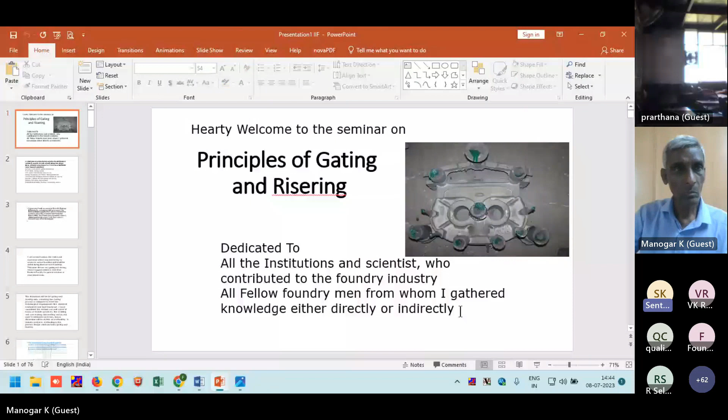Good afternoon, Manogar from Chennai. I'm thankful to the IIF Chennai chapter, Senthil, Palani Murugan, Dinesh, and everybody for organizing this. I'm privileged and thankful to the IIF Chennai chapter - they organized the same gating and risering class which I attended in 1985, if I'm not wrong. So the same thing I'm going to present, with additional information.

The topic is principles of gating and risering. I acknowledge all institutions and scientists who contribute to the foundry industry, and the fellow foundrymen from whom I gather knowledge, either directly or indirectly.

I compiled various information and experience which I acquired during my service in various foundries, and foundries visited during my development of castings for my previous employers. And regarding gating and risering, we are going to discuss, assuming that all the participants know all the foundry processes.

This is only basic working on how to do methoding, and this will be mainly on methoding only, presented for small and medium foundries, not for shell or investment castings. But some principles we can use. All the information is shared in that.

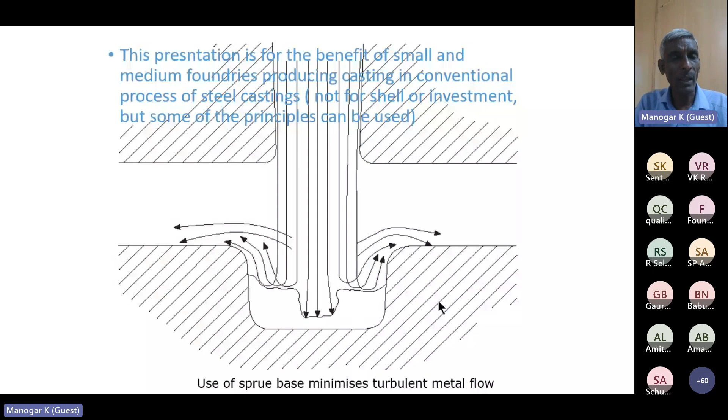So why gating and risering? Customers need sound casting. So what's sound casting? As per Steel Founders' Society of America, it is class 1 soundness at 2% radiographic sensitivity. In olden days we used to say it's sound based on the ringing sound, so we call it sound casting.

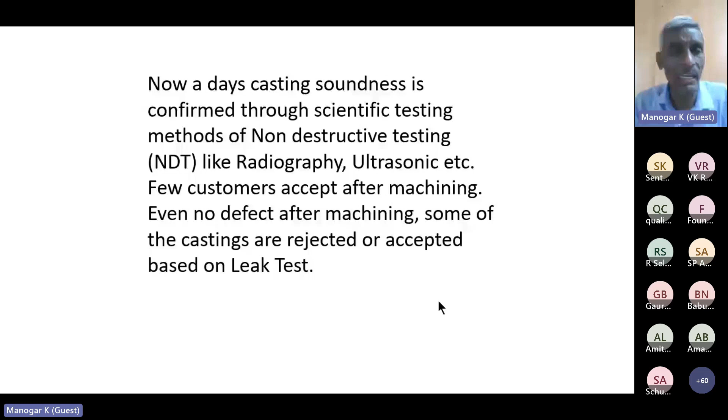Nowadays castings are accepted based on NDT results like radiography, ultrasonic, and some cases are accepted only after machining, if there is no defect, or leak test. Even some castings for food processing, you do polishing, and after polishing there should not be any black dot; small dots are not accepted. Visual inspection. Other NDT like DP, MP also is being used.

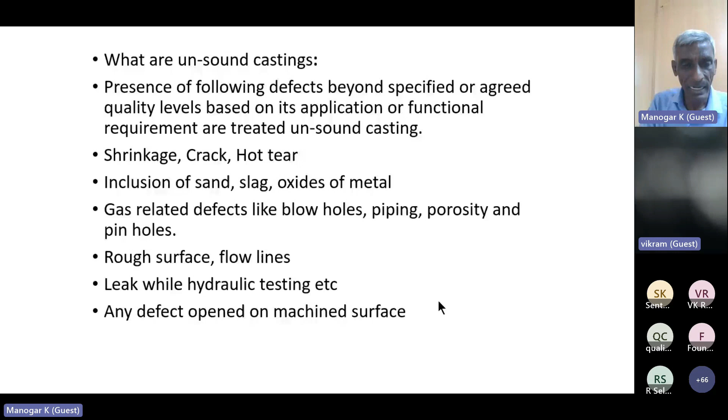UT. What are unsound castings? The presence of the following defects beyond specified or agreed quality levels, based on its application and functional requirement: shrinkage, crack, hot tear, inclusion, slag, oxides, gas-related defects, rough surface, flow lines, leak while hydraulic testing, any defect open on machined surfaces.

How to achieve sound casting? It is based on technical and economic considerations and planning right from design stage, casting process, volume, application, and ease in manufacture. That is one: component design and process design.

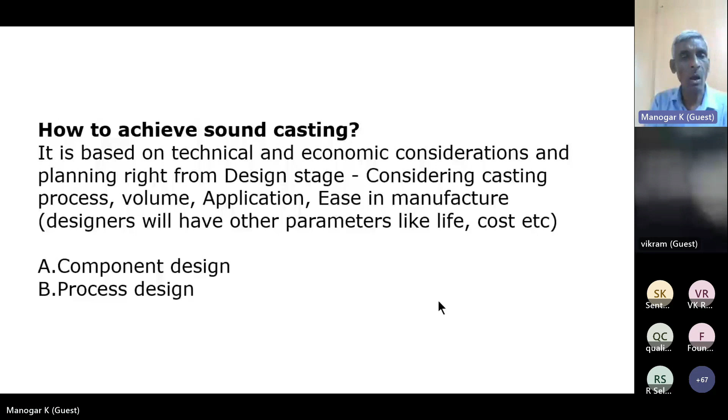The component design - we as a foundryman have to work with our customers so that we can explain our difficulties, get the design made such a way that it is easy for us to produce. So as part of designers, they also nowadays do 3D modeling and simulation, and they ensure that their design is foundry friendly.

In case of some old part numbers or some customers sending drawings where we find it difficult to produce the casting, you can always talk to them, make them understand our difficulties, and get the design changed. And foundry should always be aware of the customer and the product application of the casting, which will avoid unsolicited development. Ask for the requirements and spell out the quality that you can supply at the beginning itself.

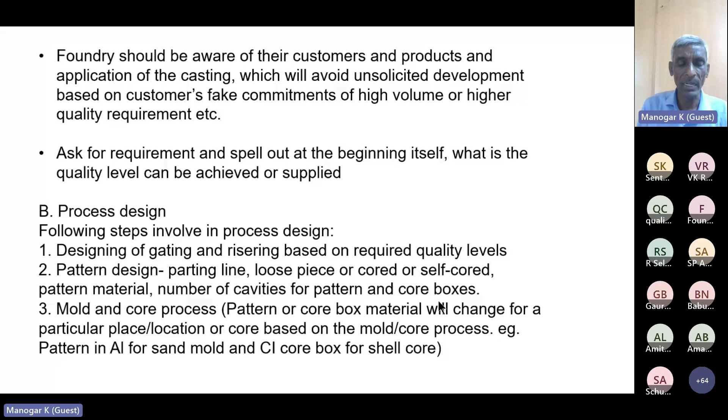So process design involves the following steps: designing of gating and risering based on required quality levels, pattern design - that includes parting line, loose piece, core or self core, and the number of cavities based on quantity, and pattern and core box materials depending upon the process.

Mold and core process, melting, ladle and pouring practices, cooling time of poured molds and knockout methods, cleaning and fettling, heat treatment, weld repair process, inspection methods of both incoming metal and finished casting, process control and auditing of internal soundness - that is sample size, sequence, first mold or last mold, sampling and frequency, once in a year, every day, or every month. What is the frequency depending on your quantity?

Designing of gating and risering based on required quality level - this will be discussed in detail. What are the other steps in this process? Pattern design.

Planning the right tooling makes good casting. Estimate the risering and gating first before you design the pattern, so that you know exactly where the parting line is, how much print you have to give, where the core locks should be given, or any other gauges, core setting fixtures, templates required for the component to come out all right.

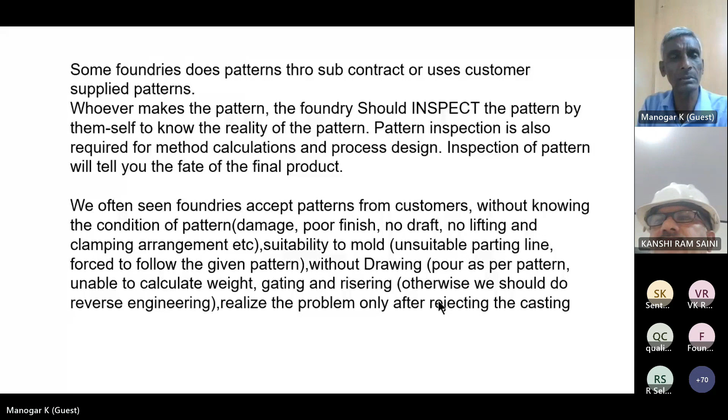What happens - foundries make patterns from outside, or they use customer-supplied patterns, but then rely on the pattern maker for inspection report. But as a foundry, we should inspect the pattern ourselves, so that the methoding person knows the dimensions in the pattern, which he can use for risering purposes. Without inspecting, if we just go as per customer pattern, then we will be in trouble, because the pattern may not be suitable for the individual foundry's conditions.

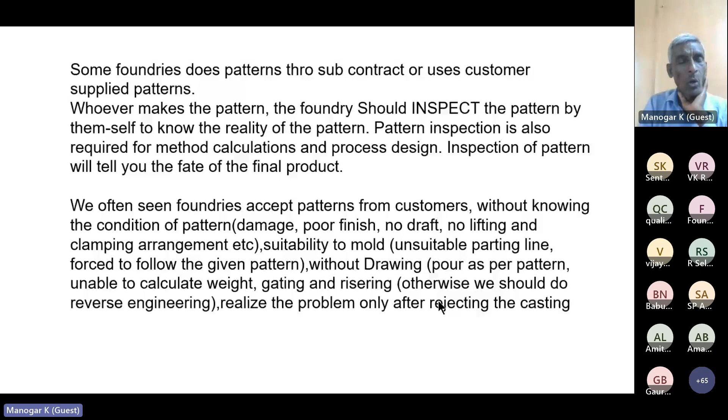Mold and core process - there are different processes, so we have to select the different process for a particular component, or a combination of processes for a given component. For example, where you would use a CO2 core may not be okay, you have to go for a shell core. And again, based on the process you decide, the contraction will vary.

For example, with the CO2 process for a core, it was 1.3% contraction. When we change the process to no-bake, it was contracting 1.6%. Then we will be landing into dimension problems.

Melting and pouring - we have to go through other details. Cleaning process - so shot blasting alone is not sufficient; sometimes we have to do other fettling or machining, either fast or slow.

Hello. Inspection of knockout. Sir, the voice is breaking. No, somebody was interrupted, so I thought I should stop. Okay, right. Now it's okay, sir, please.

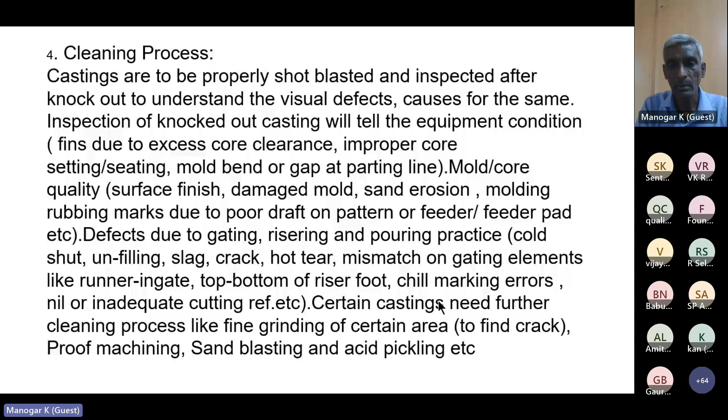Casting will tell the equipment condition, setting, mold bend or gap at parting line, mold core quality, defects due to gating, risering and pouring practice, and marking or cutting errors. Scientific designing of gating and risering will result in quality casting, either manually or using computer simulation, which will help to optimize the risering.

Why gating and rising? To achieve sound casting, properly designed gating and rising is required, apart from other parameters being taken care of. We often see foundries have all kinds of facilities, techniques and technology, but lack proper methoding. Companies invest in all that, but there is no proper person to do methoding.

So methoding decides the profitability of the foundry. If you over-rise, then it results in less productivity and loss of metal, melting, cutting, and everything. So it is good to have a proper methoding person.

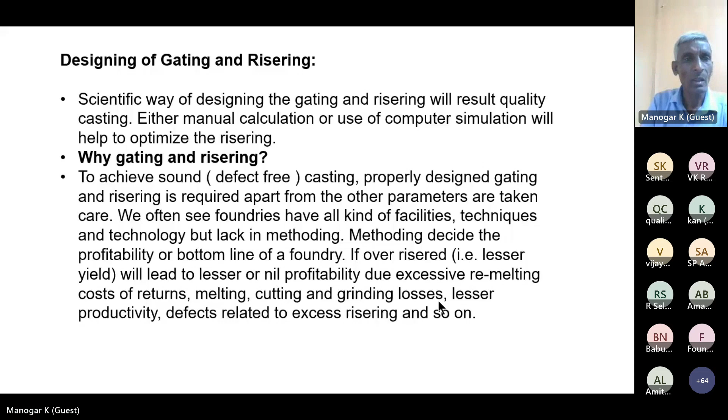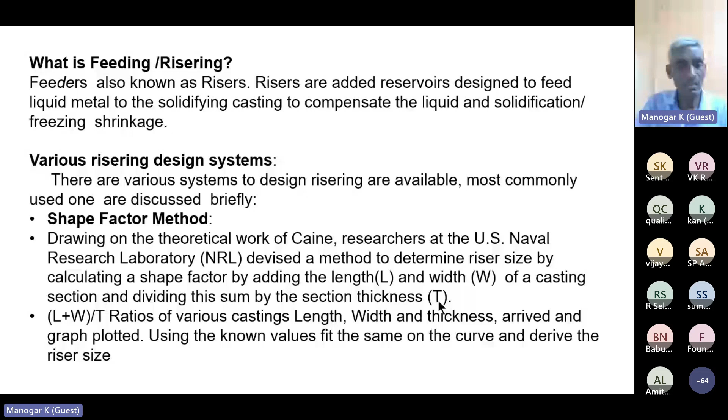What is feeding and risering? Feeders, also known as risers, are added reservoirs designed to feed liquid metal to the solidifying casting to compensate for the liquid and solidification shrinkage. There are various risering designs. This one is the shape factor method, which is not used nowadays.

There's the geometric method and Heuvers' inscribed circle method, which some people use as a shortcut. The scientific way, or the principle most used in steel foundries, is the modulus method or Wlodawer method.

As per Chvorinov, the solidifying layer obeys the rule x equals k times square root of t, where k is a constant depending upon the boundary conditions. Modulus is the ratio of volume and surface cooling area. Then there is the freezing ratio, which is the ratio of modulus of riser and casting.

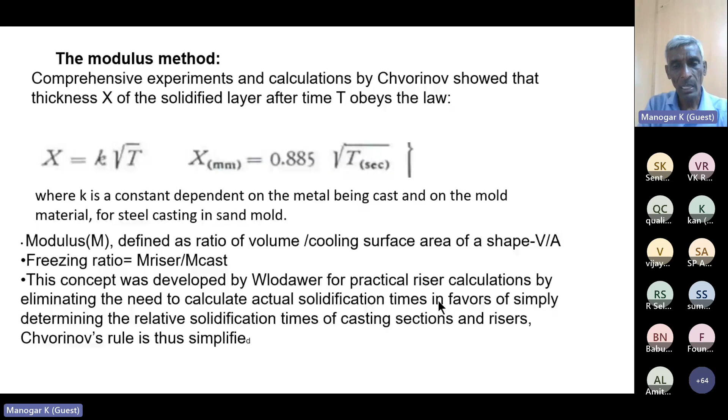This concept was developed by Mr. Wlodawer for practical riser calculation, eliminating the need to calculate actual solidification times. In this system, the feeder size recommended is deduced from the cooling modulus. The casting is subdivided wherever necessary into basic shapes, for each of which the volume-area ratio can be readily determined. Only the cooling surfaces are included in the calculation; imaginary contact surfaces are omitted. The feeder is then selected on the principle that it should have a modulus value 1.2 times the casting modulus. This will be discussed in detail.

There are three principles in feeding. First, freezing time: the freezing time of riser and casting are proportional to their respective modulus. If the modulus of the riser is sufficiently greater than the modulus of the casting, good feeding will be obtained.

Second, feed volume: the volumetric shrinkage of the casting should be fed by the riser. The riser should be capable of supplying sufficient volume of liquid metal to compensate for the liquid and solidification shrinkage of the region where the riser is connected. Volumetric shrinkage varies for different metals, as shown in the table.

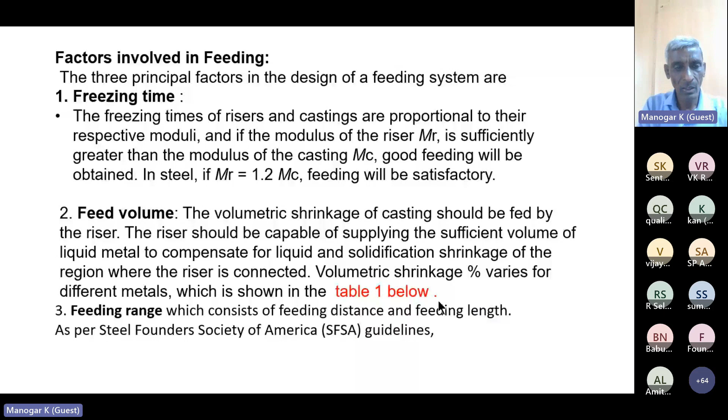Third, feeding range, which concerns feeding distance and feeding length. As per Steel Founders' Society, feeding length is the theoretical feed length of the casting or section under consideration to be fed. The distance from the riser to the farthest point in the casting is the length to be fed. It is a purely geometric value.

Feeding distance is this distance. Feeding region is the area of the casting which will be fed by a single riser. Feeding areas bounded by end zones are larger than those without end zones.

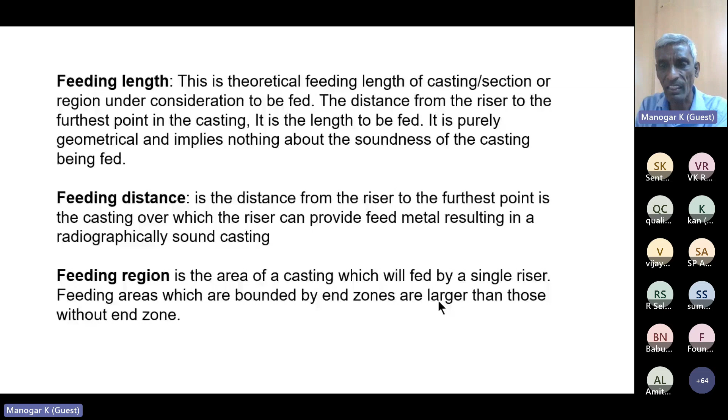The steps in methoding are: study the drawing and mark junctions and sections; identify sections needing feeding through simulation software; calculate the modulus of the selected section to find the riser number; and calculate the feeding range, feeding length, and feeding distance based on the casting thickness.

Decide whether a top or side riser is needed. Calculate the neck dimensions and foot-up if it is a side riser, and the riser should be capable of feeding the foot-up weight also.

Calculate the feed volume or weight of the selected section, marking on the drawing the feeding regions and confirming all areas are covered, in case of bigger castings, preferably on the actual pattern. Once the pattern is ready, if any uncovered area is found, you can plan for a chill, an extended pad, or additional risers.

Calculate the pouring weight, pouring time, and choke area. Calculate the gating elements. Do simulation if the facility is available and fine-tune the results.

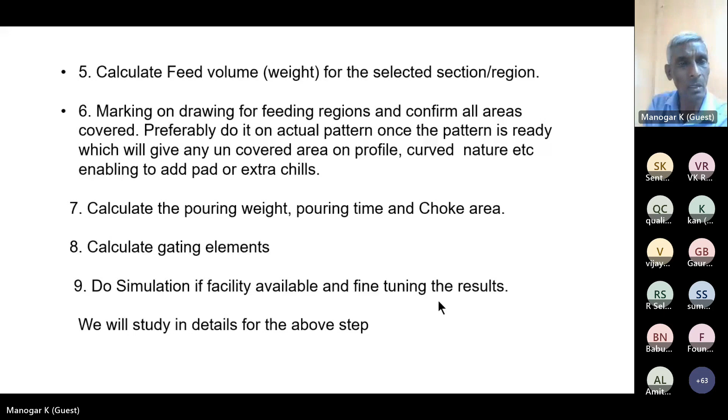So step by step we'll go by doing this method. Study the drawing and mark junctions, heavy sections that need feeding.

The science of casting modulus calculation is based on the subdivision of complex parts into simple basic components, as shown in the sketch below. I will show you an example. It must be borne in mind that the subdivision is only imaginary. The imaginary interface between two basic components is certainly not a cooling surface.

Subdivide the casting into basic shapes which need feeding and use simulation software if available. Let us do this following example. So I am taking a small example for understanding the calculations. This is a 3-inch ball valve body.

We have marked flange F1 and F2 for the second flange, ball side flange, seat ring area, and the gland area. There are 6 sections we marked. So the part is divided and numbered based on sections that need feeding.

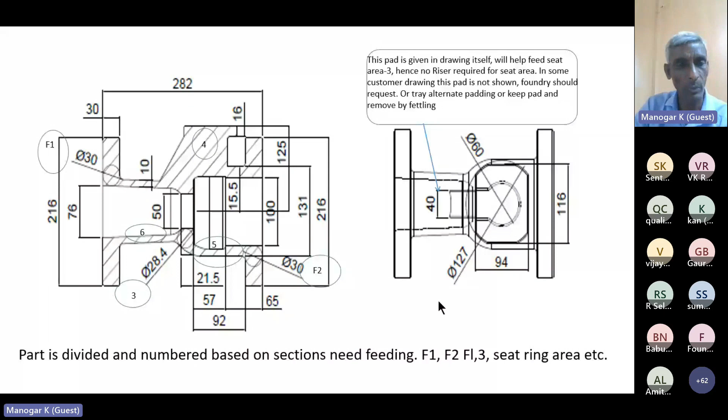Here the pad is available in the drawing itself on item number 4. That is helping to feed the seat area from the gland section thickness. This is the best design of the valve company, and it helps the foundry person. There are some items where there is no pad.

Calculate the modulus of the selected section junction. Find the riser diameter. Modulus equals volume over cooling surface area, which is shown here in the example. You should not take the drawing thickness, it should be the inscribed circle where the junction is, considering the fillet effect. The modulus should be 72 into 115.

Not viewing, sir, excuse me sir. Drawing not viewing, not able to see? I'm watching you only. Sir, we are able to see, we are getting the screen. Please check your settings. I think maybe some setting issue, sir, request to check at your end. I think we are able to see. Yes sir, please go ahead, sir. Okay, thank you.

Consider the draft and machining allowance from the actual pattern dimension. Do not follow the drawing dimension.

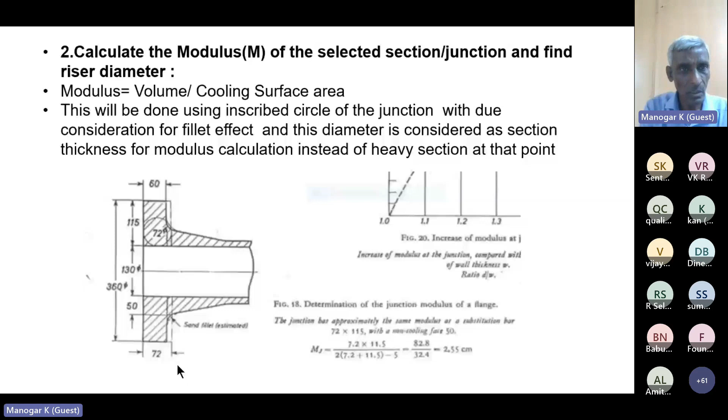With a 3D model, the modulus of an individual feeding region and weight can be easily calculated if the 3D model is available. Nowadays everybody is doing CNC patterns, so it is easy for engineers to find the modulus and weight of the sections. That is very easy nowadays.

If cored holes are present, apply a suitable correction factor. Wherever possible, required draw a full scale view of the particular section and do the calculation. Do not assume, or use the 3D model.

We need not calculate the entire casting volume and surface area. Consider only the location, area to be fed, and modulus of the selected section. The riser attached has a particular modulus to be considered. Refer to the sketches.

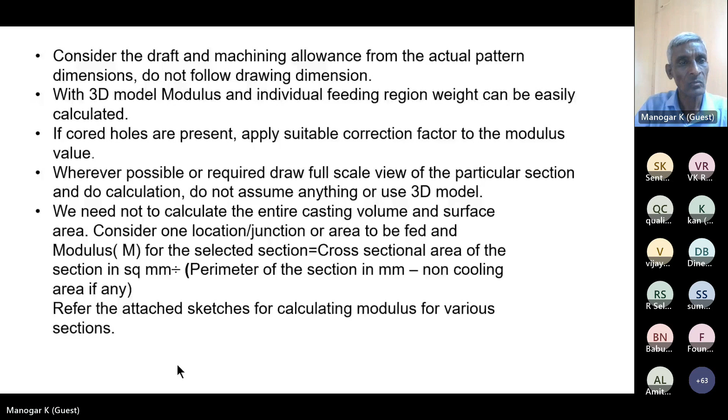These are the basic formulas which can be used for calculating the modulus for different sections. These are basic formulas you can use to find the modulus.

The feeder should solidify later than the casting, that is, the modulus of the riser should be greater than the modulus of the casting. The factor 1.2 is required to compensate for the additional cooling surface area which is generated as the riser continually feeds metal to the solidifying casting.

For steel casting, multiply the modulus in mm by 6.4 for a sand riser, and 4.3 to 4.5 depending upon the sleeve efficiency which you have arrived at in your foundry for the exothermic sleeves. Follow the standard table provided by the sleeve supplier, and do not mix other supplier sleeve standards with another one and get confused.

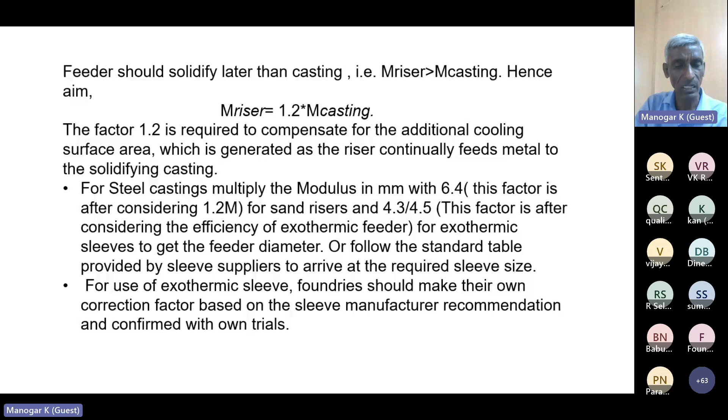Foundries should make their own standard correction factor based on sleeve manufacturer recommendations, and do a cube test to confirm the sleeve efficiency and factor of safety.

So we go as per the drawing, F1, F2, F3, F4, all the sections. We enter the dimensions and find the mean diameter, casting thickness, flange circumference, cross section area, and now the modulus, the non-cooling area.

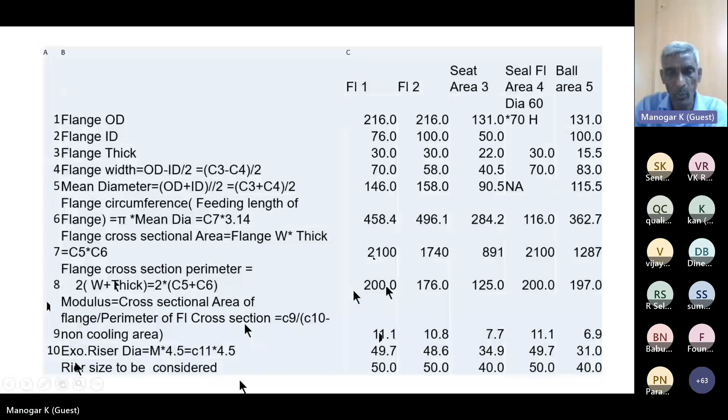Serial number 8, flange cross section perimeter. This modulus equals serial number 8, C9 by C10, 11.1. So the riser diameter considered is 49.7, which we are rounding up to 50.

Like that, in every section the modulus is calculated and the riser is arrived at. This is available in the Excel file, and I can share it if anybody wants.

Calculate the feeding range, feeding length, and feeding distance. As per the plan, it is already given the circumference, that is the feeding distance supposed to be fed, and the thickness of the flange is 30 mm. So for the flange thickness, the feeding length, feeding distance, is 4 times the thickness.

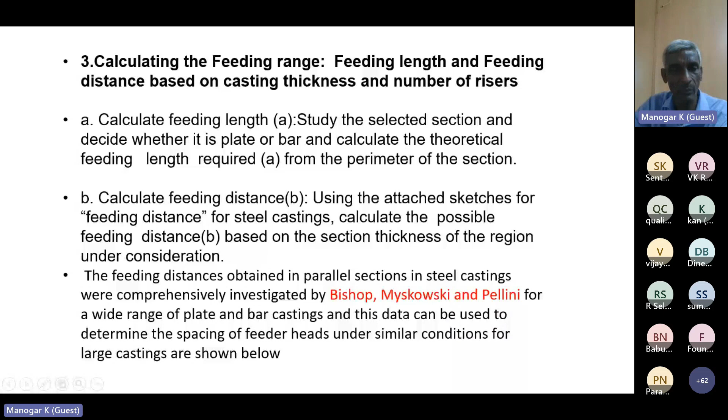So from the riser side, on both sides, calculate the feeding distance obtained in parallel sections were comprehensively investigated for a wide range of plates and bar castings. This data can be used to determine that, as shown here. So you can use these sketches to find the feeding distance and use the feeding distance formula.

Calculate the number of risers, adding the diameter of the riser and the 4T or 5T with or without chill, whatever is shown, whether it's a plate or bar, and find out the feeding distance for a particular riser on the section thickness. So the number of risers is found by dividing the feeding length by the feeding distance.

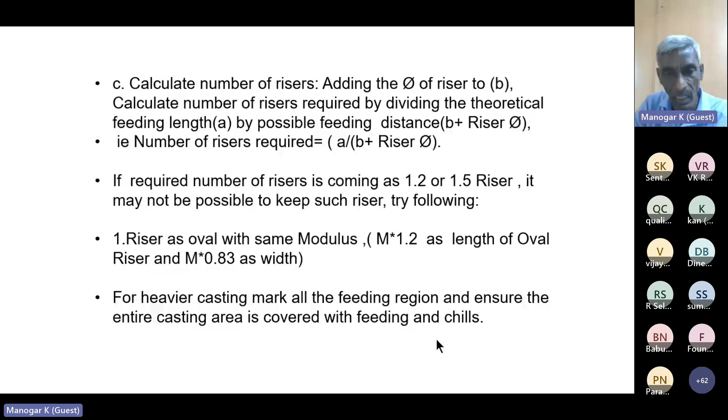You can follow like this. This is the example given. So without chills, the number of risers is more. When you use the chills, the number of risers is reduced, and it improves the yield.

So feeding distance can be increased by adding padding or chills. The padding methods will be shown in the last sketch. And decide whether it is a side riser or top riser.

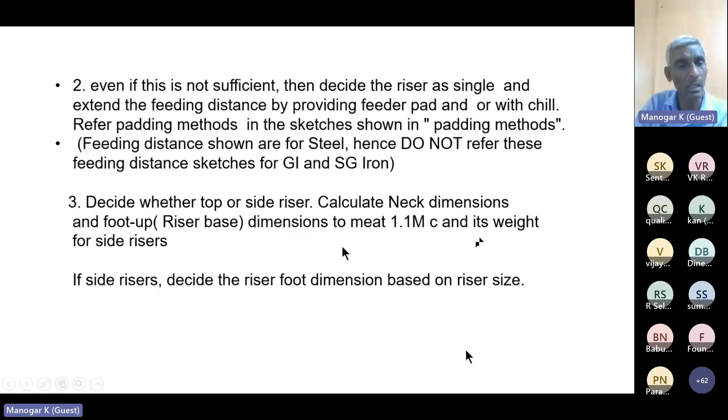If it is a side riser, then you have to calculate the neck contact modulus, which should be 1.1 times the modulus of the casting. The side riser should then have a foot up to keep the riser. Then the foot up weight also has to be considered along with the casting weight for the riser to feed.

So here the flange circumference is 458, feeding distance of the riser is 240, that is 4 times the thickness. Number of risers required is 1.5, so round it up to 2. Like that, all 5 sections, we arrive at the risers.

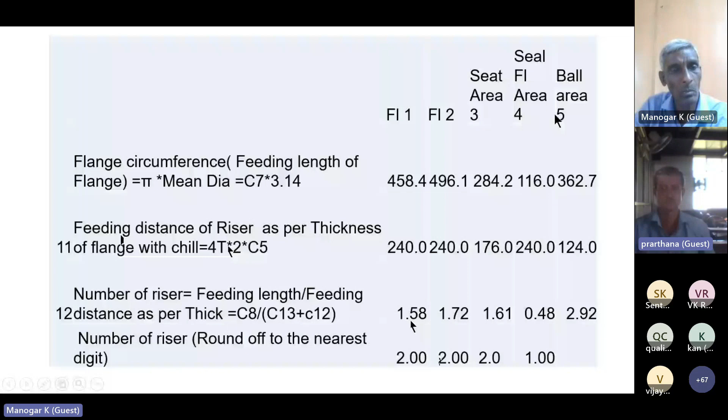Cross check the neck modulus and ensure that it is meeting 1.1. Otherwise, adjust the dimension width or thickness depending upon the section you are going to connect. Because sometimes the width may not connect, then you may have to increase the thickness.

And also sometimes top and bottom risers are coming, then you have three risers, then the foot up should go fully in the bottom, so all the necks should be in the bottom. You have to decide accordingly, depending upon the number of risers and the position of the riser which you are going to use.

The neck, the foot up radius, should be a spherical radius. Normally I see foundries not keeping the spherical radius for the bottom side of the foot up. So it is better, so that it will have a better surface area and improve the yield.

And it should also have a well base. This is also not followed in many foundries. They simply keep a flat base. It is suggested to use a spherical base.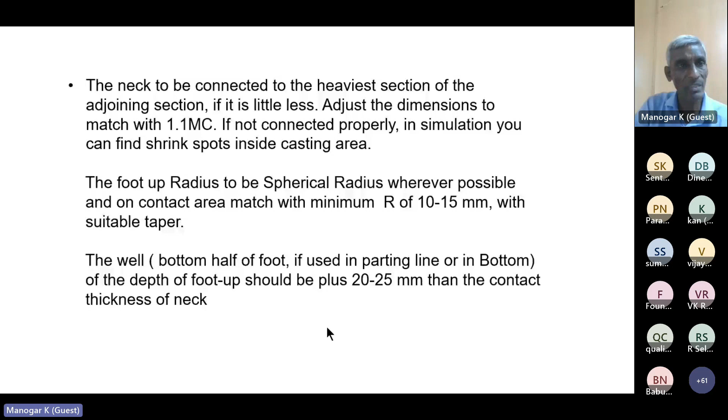Calculate the feed volume for the selected section. For feed volume, we need not calculate the volume. We use the weight from the model.

The weight you have to calculate is the casting weight for the given particular riser region, that is, what you have marked as the feeding distance and the riser. And along with that, for this example here, the flange and the flow bore, there is a 10 mm wall thickness area that will also get self-feeding from the flange.

The adjoining area up to the 4T or 5T and the foot up weight. You have to calculate both the foot up weight, the adjoining area weight, and the job weight.

Using this weight, calculate the volumetric shrinkage to be fed from the riser for the selected area. The volumetric shrinkage varies depending upon the alloys which you are going to cast.

So these are some of the examples given. Carbon steel 6-7%, and heat resistant steel with different chemistry, and cast iron expansion. Even though they say cast iron has expansion, for heavier sections we still have to consider risers.

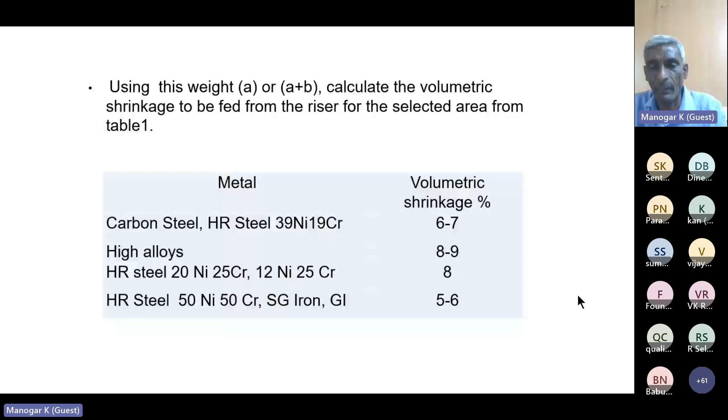Calculate the riser height based on feed metal requirement. We already arrived at the riser diameter, and we know what weight we need. So we have to find out the height from the weight we need from the riser.

So the riser efficiency should be considered. For that riser, whatever riser metal you are using, either sand casting, insulating riser, or exothermic riser, its efficiency is given by the suppliers.

So take care of that efficiency and calculate the riser weight you want. Foundries should make trials and set their own standards to confirm the efficiency.

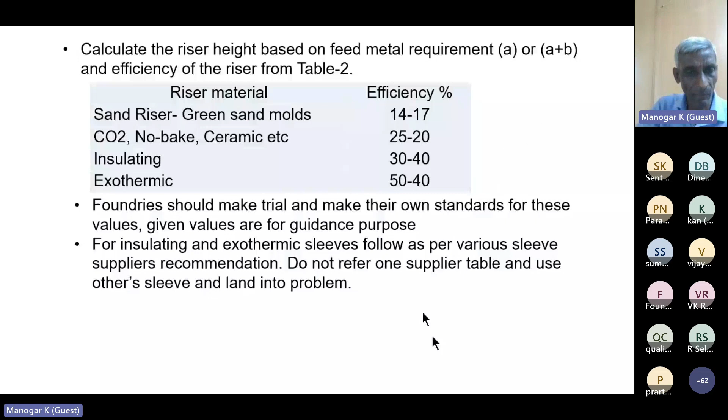Calculate the riser weight and height as explained in the given example. So we will see the next calculation.

The weight of the riser is 7.6 kgs. At 6% for steel casting, the feed metal is 0.45 kg. So it will vary depending upon the section thickness.

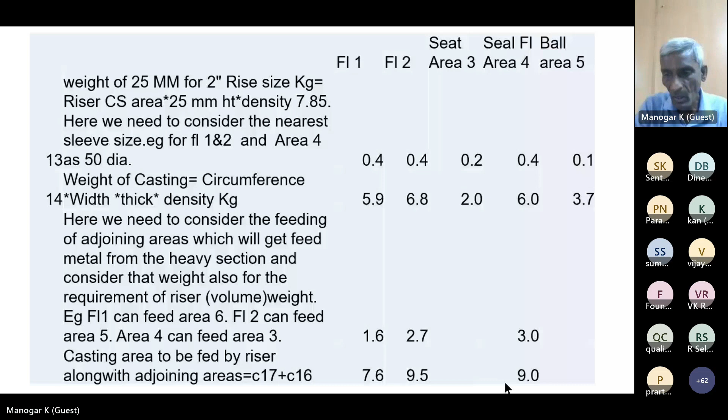Calculate the riser weight and height as explained below. Weight of the riser for 25 mm is taken as a guideline so that I can arrive at the height. Weight we want to feed is 5.9 kgs. For that, volumetric shrinkage is as per 6%.

Weight of the casting to feed per riser is 3.8 kgs. Since number of risers is 2, we need to add side riser, then consider the weight of the riser foot up, and that is 0.9. Total weight to be fed by one riser is 4.6 kgs. So feed metal required at the rate of 7% for this 4.6 is 0.33 kgs.

The efficiency of the riser is considered as 40%. So then weight of the riser should be 0.96 kgs. Divide this by the 25 mm height riser weight, and we will get the riser height. This is 2 inch. So 2 inch is sufficient, but we have the job height.

The job height above the parting line is 108 mm, and with the foot up, it is coming to 72 mm. So you can go for 3 inch, but above the flange you have to keep for the safety for the liquid contraction. So we are keeping 50 by 100 mm. So this is the riser height we arrived at now.

Repeat the steps for all the other areas like this. Weight for all risers, add casting and foot of weight, and find feed metal requirement.

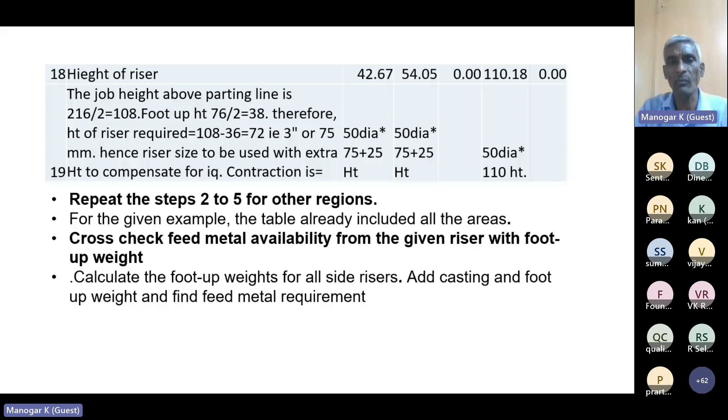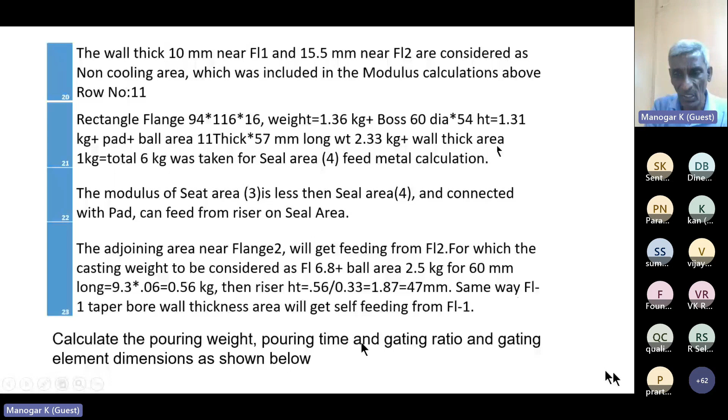Calculate the pouring weight, pouring time, and gating ratios and gating element dimensions. Follow the gating ratios depending upon your experience on the metal being cast.

In steel foundries we normally use unpressurized gating. I've seen some foundries use pressurized gating also for some items. So different ratios are followed for pressurized gating and unpressurized gating, as given.

Considering the riser diameter and height, riser weight is 7 kg, riser foot of weight is 4.5 kg. Assume a down sprue gating system, and pouring casting weight is 25 kg. So now the pouring weight is 38.5 kg.

From this, find the pouring time. Pouring time is the square root of pouring weight using the formula. And from this pouring time, you find the choke area, that is square root of pouring weight by 1.1 times the pouring time. That is coming to 30.16 mm diameter.

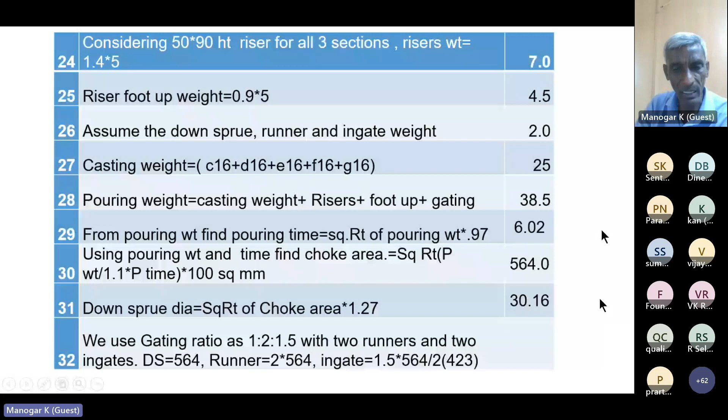That is the choke, that is the down sprue diameter, because in steel casting, down sprue area should be 30 dia. Then using the ratio 1:2:1.5, calculate the runner size, that is given here as area, and in-gate area is given.

Calculate the theoretical yield, casting weight divided by pouring weight. After actual casting, record the actual casting and pouring weight in the sample route card.

Now you can decide the parting line and the process. Plan for additional requirements of mold box, riser sleeves, padding, material lifting and clamping arrangements, pattern, mold card, everything, and process parameters like chills, profile chills, core hollow making piece, templates, and fixers for core assembly, etc.

This is part of pattern design, but after designing the gating only, then we know what things are required. So this is my suggestion. If you can use that.

When the pattern is received and made ready, arrange inspection and match plating if required, to require loose gating and lifting arrangements for the pattern, computer aided. If software is available, run the simulation and confirm the result or fine tune before sampling.

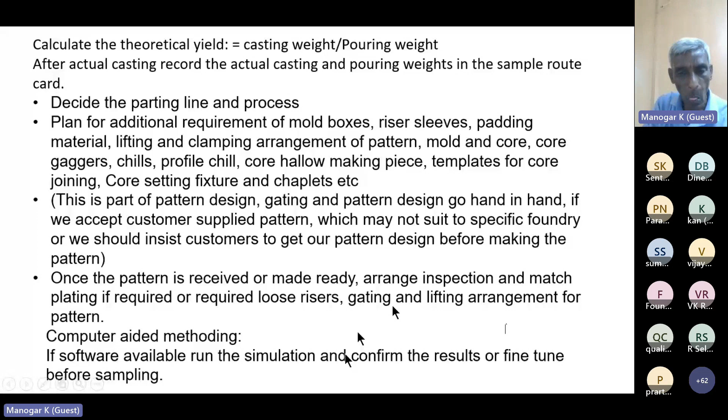Sample casting. Make a method sketch. Write all information like size, type, and number of risers, mold and core process, box size, special instructions.

Instruction to include method card and pattern or core box or marking, use of dummy or making hollow in cores. This is especially important in steel castings to avoid any crack.

And marking up, cutting in the mold brackets, cooling brackets to avoid cracks. Use of templates for core joining, core pasting, since two halves are always joined in steel foundries. So you make gauges for that.

And in some areas we use zircon or chromite sand to avoid fusion and to avoid in between seals, to avoid cracks and avoid fusion. We will put it in the fillet areas.

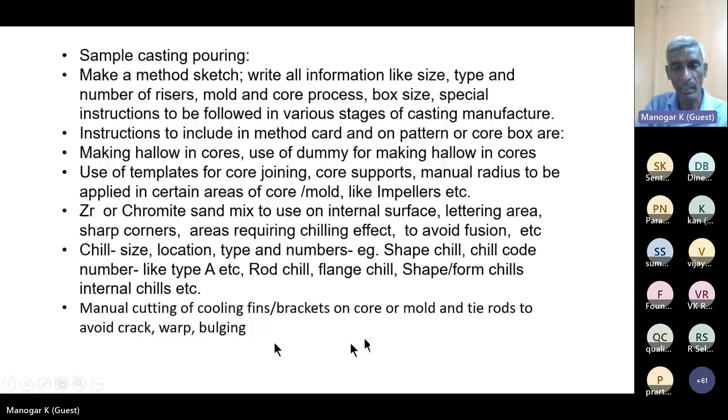All that you have to mark in the method card and also on the pattern or core box wherever it is required. And for chills, we can fix a location and write the chill size, type of chill, riser type chills, quantities, all that.

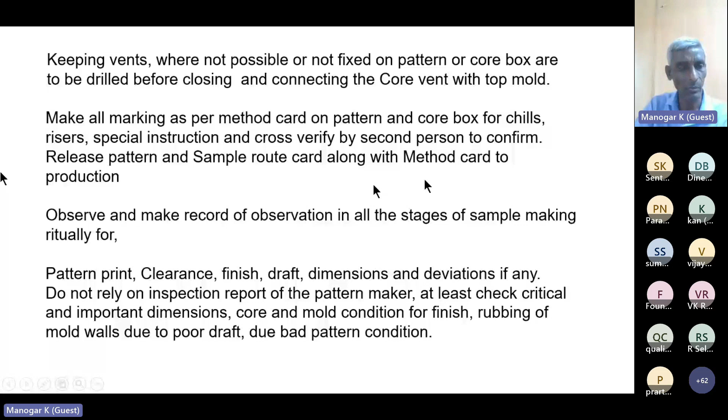While making the sample mold and closing, please observe all the steps. Making the mold, core setting, closing, clamping and weight placement, everything should be observed by the development person, so that he knows if any step is missed or something happened that is going to affect the quality of the casting. We can correlate after that by seeing the knocked-out casting.

Check mold core wall thickness, parting line mismatch, mold bend, and gap between cope and drag. Some foundries keep video or photo also for sample making and closing.

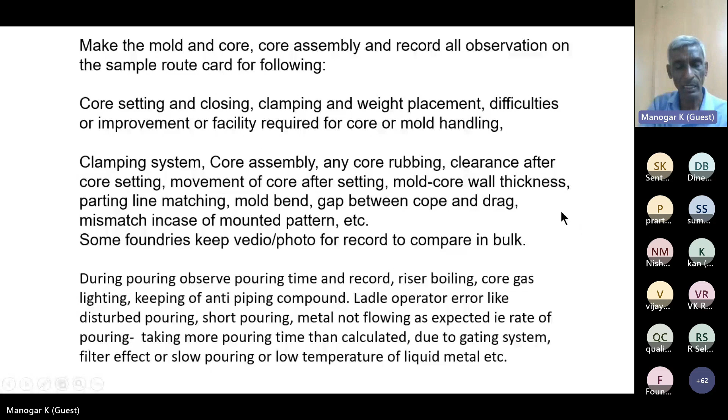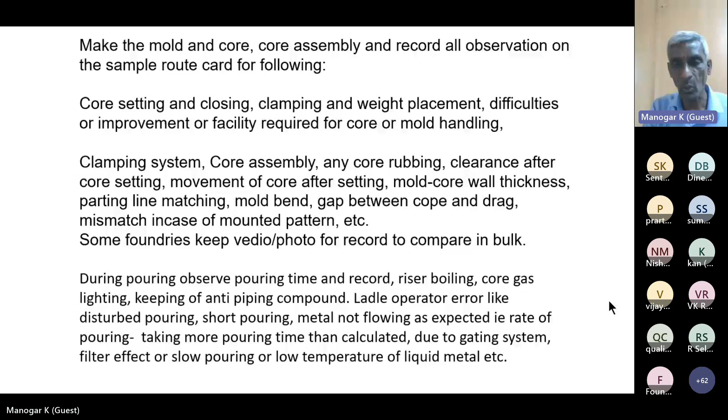During pouring, record the temperature, pouring time, temperature in the furnace, temperature in the ladle, and lighting up the gases and providing the anti-piping. But for the anti-piping compound, people are not simply putting some quantity - as per the supplier, you have to weigh and keep the packets and put it properly, not just simply putting by your spoon. This one point is missing in many of the foundries which I visited.

Pouring time is an important thing - whether as per the calculated pouring time it was poured or not, and if there was any difficulty or disturbance while pouring, the person should record all that, so that based on the casting result, we can correlate the reason for the defects.

First, after shot blasting, you have to inspect for any difficulties in cutting and visual defects. Also the person should be involved in the dimension inspection and see that the person is following the drawing reference and taking the pattern reference, not on the ground area or mismatch casting. All this inspection is also part of what the development person should observe.

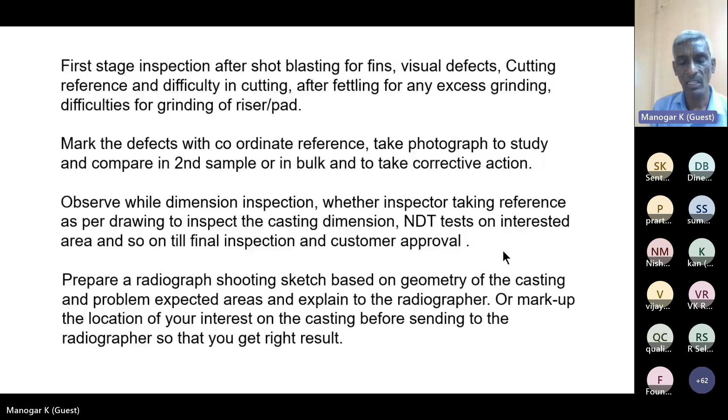Observe the NDT results, especially RT - before sending the casting for radiography, you should have the casting thoroughly inspected. Any visual repair should be done and a note taken of the defects, then send the casting for RT. Sometimes what happens is people, for urgency, send the casting without checking. Then the visual defects are seen on the RT, and they unnecessarily repair and take action for that without knowing it was a visual defect.

The method person should be aware of NDT reading, how to interpret the film. Many times what happens is the NDT person gives a report calling gas or shrinkage a crack, or misinterpreting crack, gas, or shrinkage.

The shooting sketch also you have to be careful about and see how they are shooting the casting. The RT film view should be evaluated for any expansion or contraction of the view compared to the casting size, which will change the assessed level of the defect.

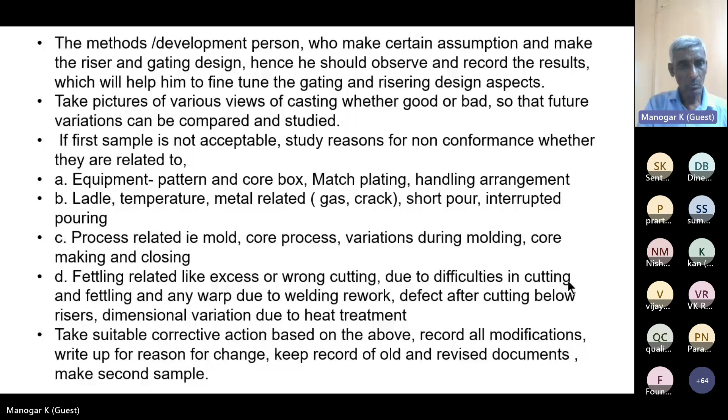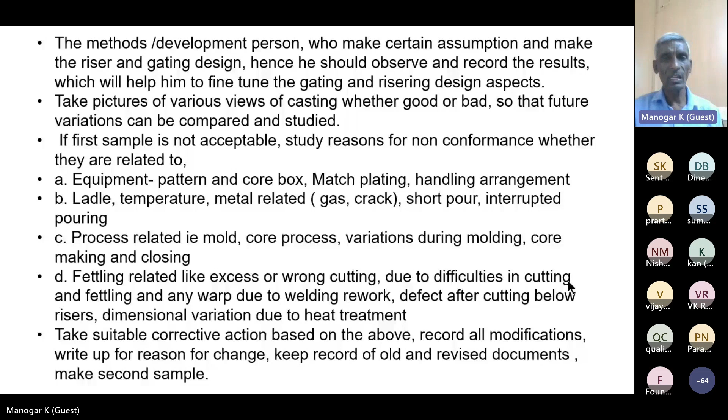For method change, keep a record of old casting dimensions, machining allowance, defect location, nature and percentage of defect before proceeding for method change. Sometimes a revised method creates a new problem - without seeing the actual effect, if we simply change something, we invite some other problem because of the revision. Sometimes we have to change the top and bottom totally together, so at that time this record will help.

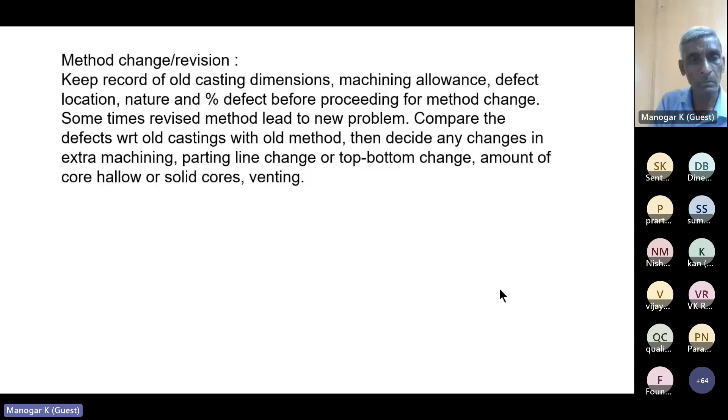As per Scrata, some points I want to share here. They suggest it should be a faster or shorter pouring time. In many foundries, the pouring time is not as per what I suggest - square root of pouring weight or less than that - but it is more than that. In that case, we end up having a lot of defects.

Scrata suggests using faster pouring, and to achieve faster pouring and meet the pouring time, our down sprue and the nozzle should be matched. The down sprue diameter should be 1.2 times the nozzle diameter. First we decide the down sprue, that is our sprue diameter or choke diameter. Based on that, the nozzle should be selected in the ladle, in case of a bottom pouring ladle. Throttling should be completely eliminated if the nozzle diameter and down sprue are matched like this.

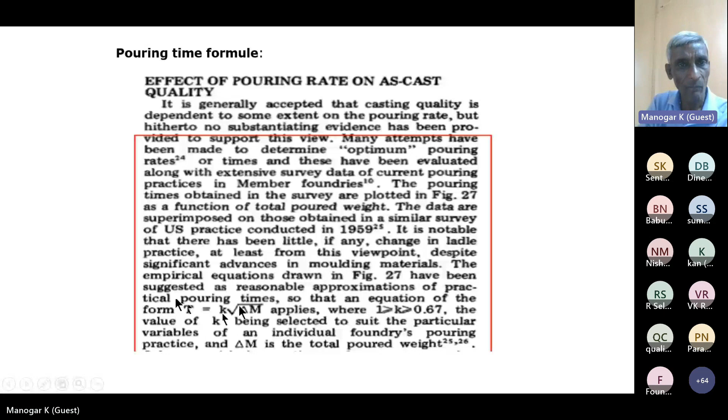Ingate in bottom and top runner, both are working. The pouring time they are suggesting is square root of pouring weight into K - the same thing which I am following. And if you are pouring fast, inclusion and erosion issues can be avoided. That's what they are saying.

Inclusion also arises from breakdown of the mold - the degree of erosion likely to occur in a mold system is less when the mold is poured quickly. Faster pouring also allows pouring temperature to be reduced, so you can reduce the cost and reduce the defects related to high pouring temperature. More consistent pouring time should result in a general improvement in as-cast quality.

Pouring rate can be achieved by simply eliminating throttling by the ladle operator. Nowadays, the quality of the casting is in the hands of the ladle man who is throttling the casting. So to avoid the throttling by the person, we have to design our nozzle and downsprue properly.

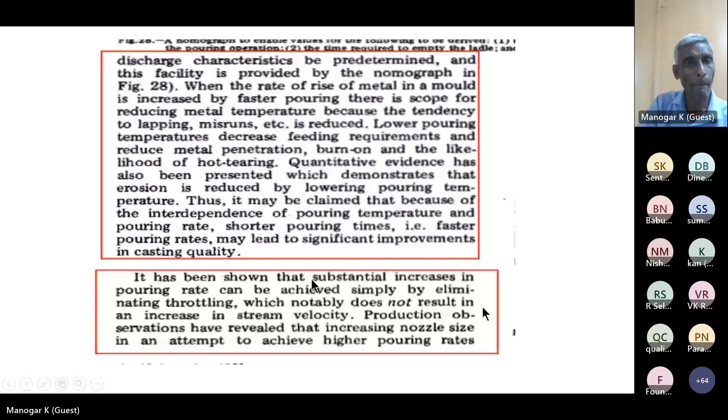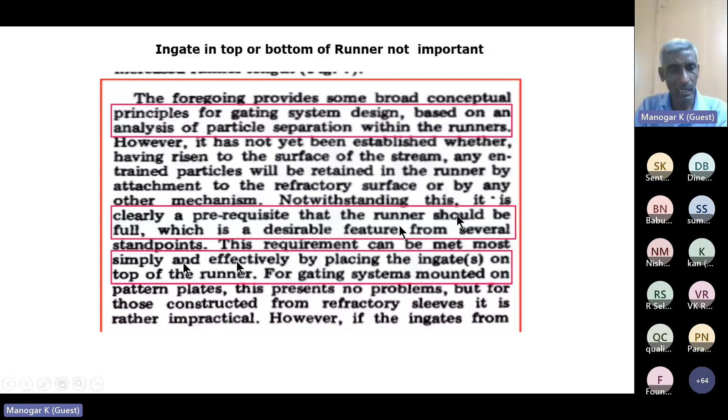Ingate in the top and bottom are both working, but preferably the ingate should be in the top and runner in the bottom. So that gives effect simply by placing the ingate on top of the runner for the gating system.

This is some of the defects due to premature neck modulus, that is solidification of the neck. That is why we say the neck modulus should be 1.1. Sometimes we assume this is pinhole porosity, but it is actually a centerline shrinkage.

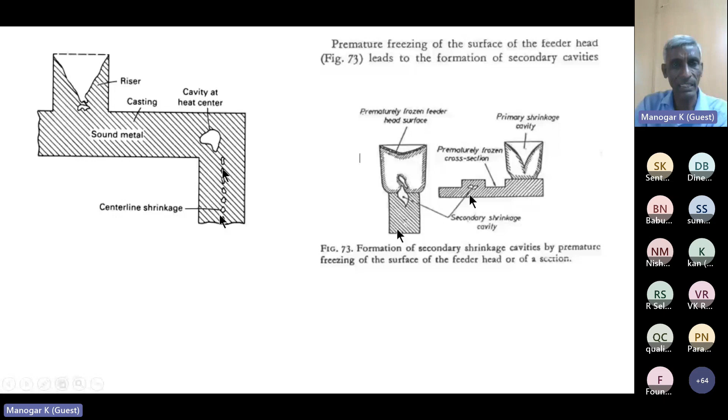In some castings, due to sharp corners and very close flank to riser, there's a gas problem that should be taken care of and not misguided with the defects. Always avoid sharp corners and sharp edges in the pattern, core, or in between the riser and flank section.

Is there any questions up to this? So I can go for any risering and gating principles. I think we can have a question and answer session at the end of the session, sir.

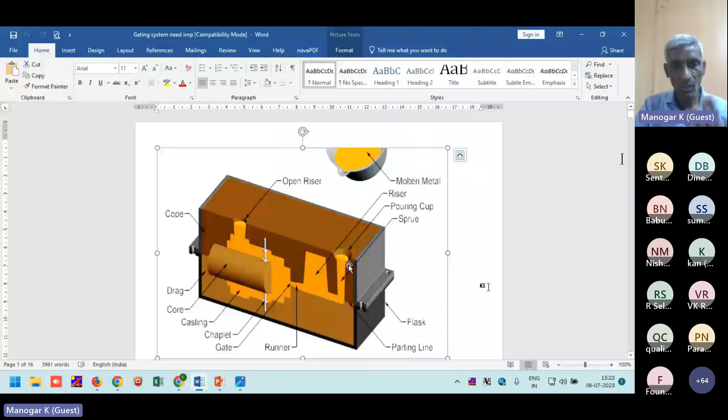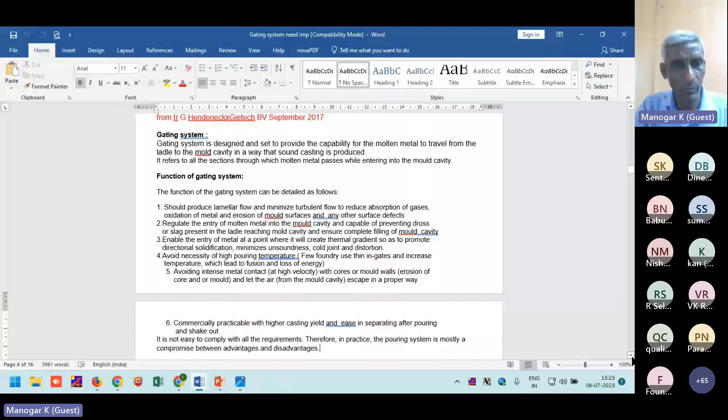Yes, we can go for gating system, the different gating systems. You know everything, so I'm not going to elaborate. Gating ratio we are the same, I think we will not elaborate all this, since people want this and all are experienced persons.

The functions of gating should be to produce laminar flow and minimize turbulence. Turbulence will create other defects, so it should be a laminar flow. For that, we are using the non-pressurized gating system in steel foundries.

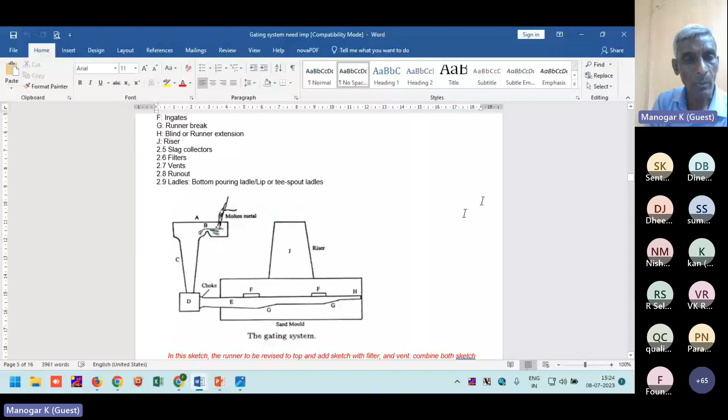Elements of gating you know: runner extension, sprue base, pouring basin is required for all the bigger castings, and vents for all bigger castings and core prints where there is no open riser. For heavier castings, you have to go for ladle, bottom pouring ladle.

For that, we discussed the diameter and chilling methods. When we are using chills, there should be an air gap, and that will have a lesser effect. How to keep chills, what they look like, and the effect of chills, you can also see.

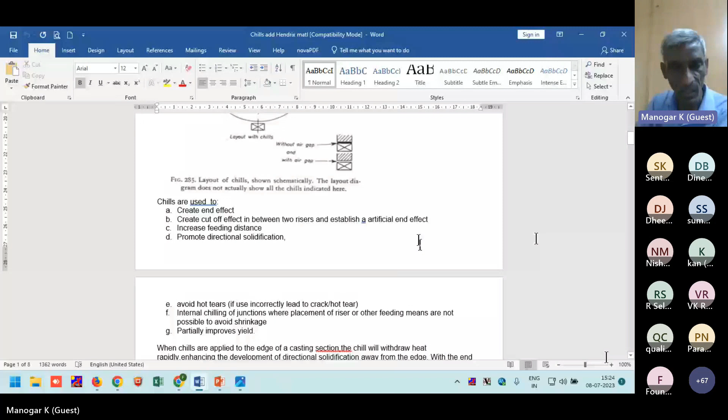Chills are used to create end effect, create cutoff effect in between two risers, and establish an artificial end effect, increase feeding distance, promote directional solidification, avoid hot tears, internal chilling of junctions, and partially improve yield.

Types of chills we use: external chills, internal chills, and based on that, top or cope chills, drag chills, profile chills, rod chills, like that. The thickness of the chills should be 0.5 to 1 times the thickness of the casting. As per Wlodawer, 0.66 is effectively working.

The width of the chill should be T to 2 times, and length can be up to 3 to 4 times, depending upon the feeding distance you are looking for. People use up to half of the profile also.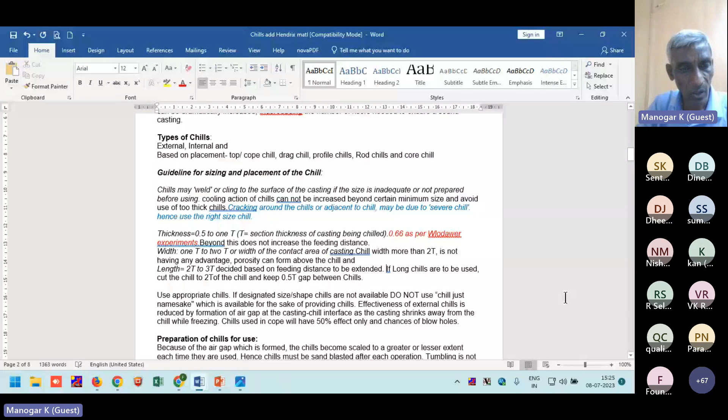The use of chills is important. Prepare the chills properly, ground, coat with a chill coat, and use the correct chill based on the section thickness and the type given in the method card. Do not use the chill just for namesake, because we always see some people make wrong chills and fuse them with the casting, causing problems in bulk castings. So chill management is important in the foundries.

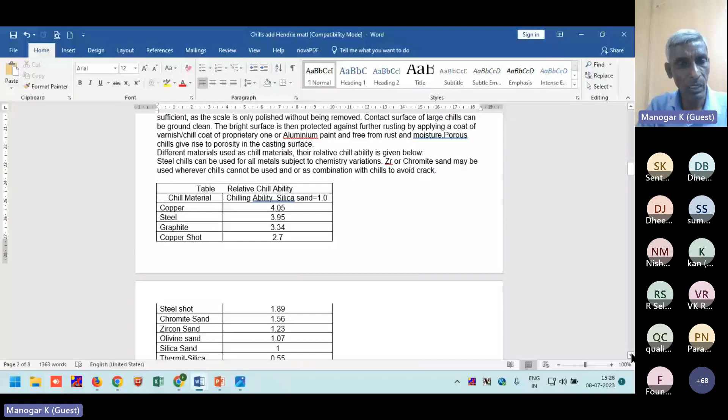These are properties of chills, showing how the cooling effect differs, but most foundries still use steel slab chills. A chill works for up to 4 times less casting thickness. Sometimes we are using shots, chromite sand, or zircon sand. Their effect is given here, you can make use of this.

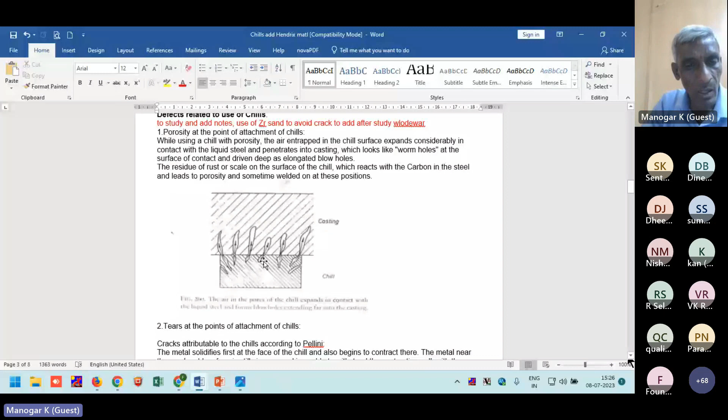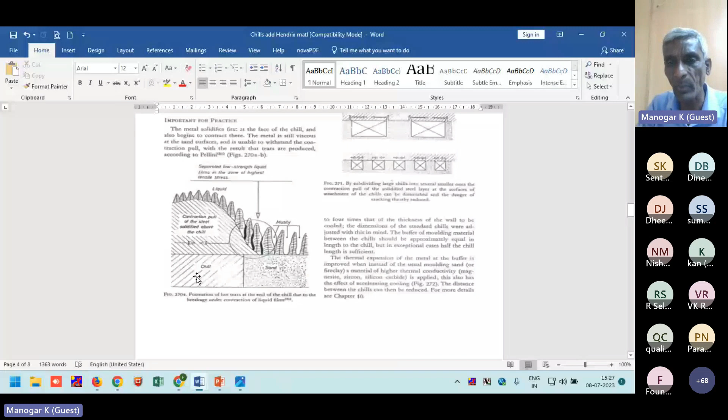The defects related to chills are: if the chill is not properly ground or coated, then you will have gas defects below the chills. That is always a problem in steel foundries. And if you are keeping too many chills, there is a chance of cracks around the chills. So you have to distribute the chills and keep a proper sand thickness in between chills.

So inside chills, where you will get a crack, they gave some examples and went through it. And the defect due to adjoining chills or tears.

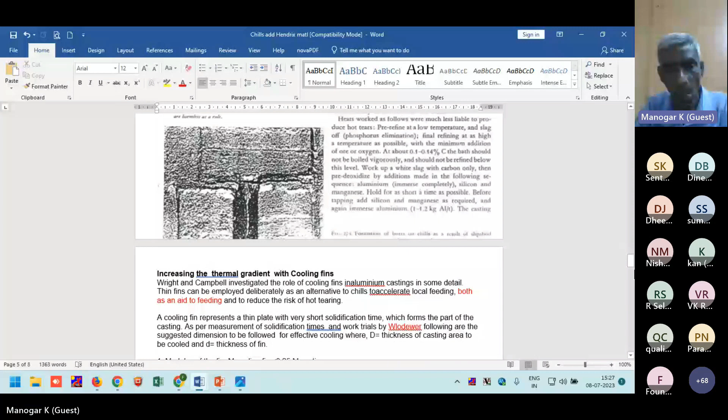And in some cases we are using fins. So these fins will work in place of chills, but we normally use them for avoiding cracks, cutting by way of cutting brackets in steel castings.

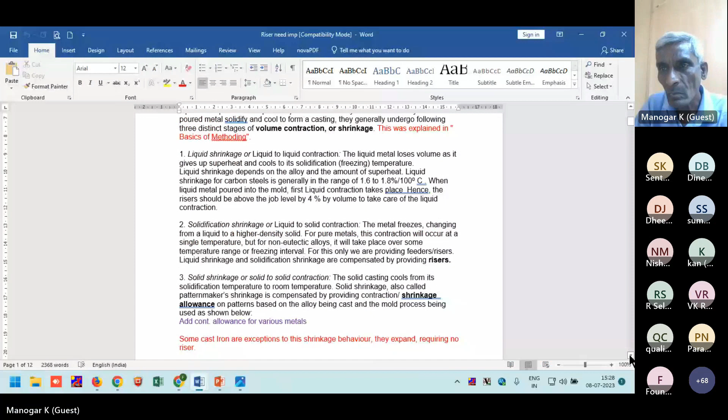The risers, anyway, we have discussed. So why do we use the risers? If the metal is melted and poured at high temperature, solidification or liquidus temperature plus superheat is there to increase the fluidity. With the pouring, the metal solidifies and cools to form a casting.

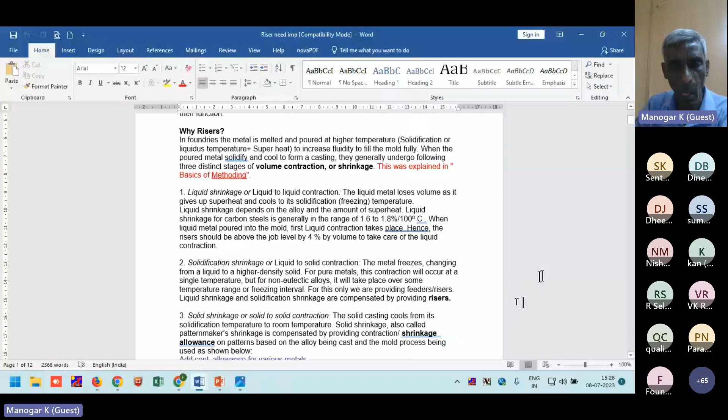They generally undergo the following three distinct stages of volume contraction. One is liquid shrinkage, that is taken care of by riser height, extra height, and the solidification shrinkage, that is liquid to solid contraction. For this, we are keeping the risers.

So that's why we have discussed so far how to calculate the riser. And the solid contraction, that is taken care of by our shrinkage allowance in the patterns.

Risers should have adequate volume to ensure availability of feed metal to all sections, satisfy molding constraints and thermal adequacy, and economy of the casting, that will give a higher yield.

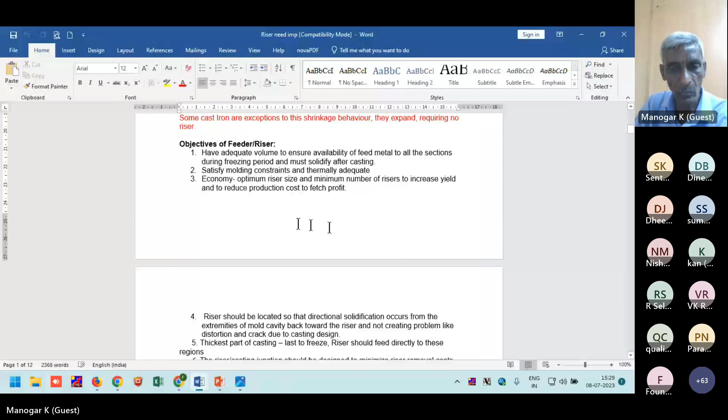And it should promote directional solidification. The riser-casting junction should be designed to minimize the riser removal cost.

Type of riser based on the placement: it is top, side, or core riser, open and blind riser. Based on riser material: sand, insulating or exothermic. And based on the shape: spherical, cylinder or elliptical shape. And there are shared risers, that is a common riser for two junction sections or two castings.

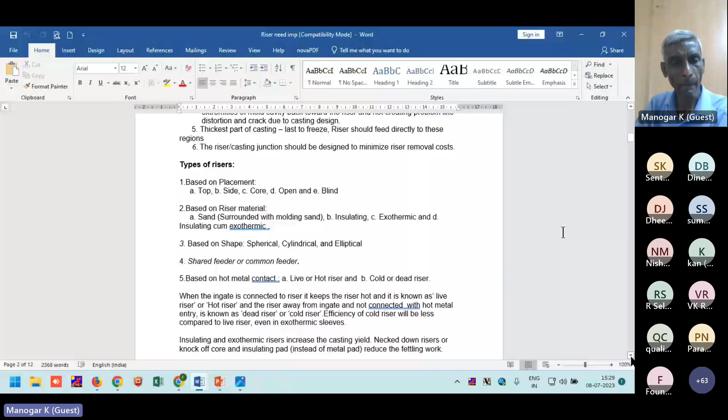So I think with this I conclude. If anything, any questions we can ask.

Hello. Gentlemen. Hello. Yes, sir. So are you able to hear me? Yes. Gentlemen, I think the speaker has completed his presentation. If you have any queries, we would request you to raise it now.

Sir, I think there are some questions in the chat. One Mr. Ravi Shankar has raised a question: what is the advantage and disadvantage of in-gate connection? That is at bottom cavity, at parting line, nearer to middle height range of cavity, and third at the top side, in SG casting in-gate design.

Okay, that is like a step in-gate, it's asking. The bottom in-gate is always advisable, but making bottom gating, especially in SG iron, is difficult unless you use a refractory gating. Parting line gating is always what we are using.

In that I explained whether you can use an in-gate at the top or at the bottom of the runner. So using at the parting line, runner, in-gate, and runner over the in-gate is a preferable station as per my experience. And top in-gate connecting to the riser is best to feed the riser with hot metal. It is possible for you to keep such a gating system, that is good, depending upon the casting nature or your process. If you are using a vertical parting and cake mold, then all this is possible.

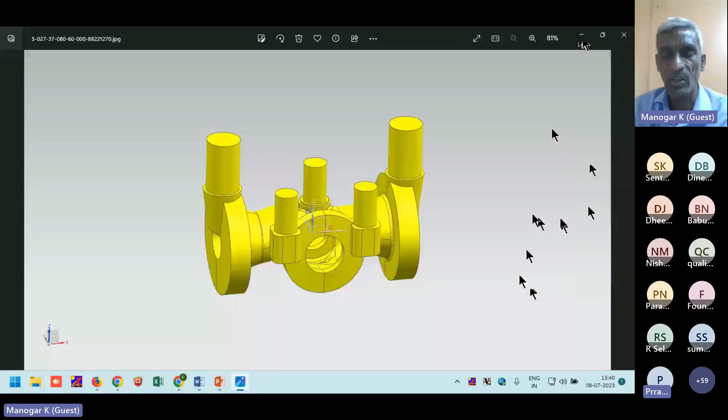But for smaller castings, thinner casting, even 0.5 times the diameter working height is also working where there is not so much feed metal required, but riser is required, especially in SR heat resistant steel castings. For the junctions, we can keep smaller height also. In case of exothermic, not sand riser, people are using 1:1 riser ratio and they are getting good results.

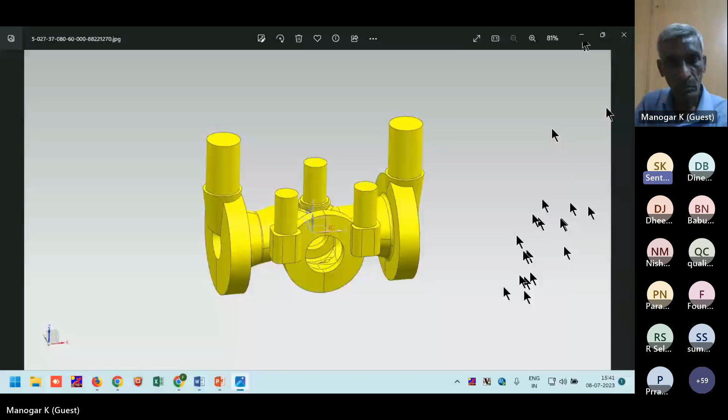Hello. Hello. Sir, yes sir, your voice is breaking, sir. Can you put this content in the chat please, one minute. Meanwhile, go for other questions which have come in the chat box. Okay no sir, no problem. Mr. Dinesh Babu has asked how to calculate pouring time.

Pouring time, it is there in the presentation: square root of pouring weight into the constant, that varies from molding process 0.67 to 0.885, even 0.9. The formula is there in the calculation, that is the formula which I am using and practicing. It is mentioned in the presentation. If you haven't noticed, it will be uploaded on YouTube, you can see it at a later time, sir.

Okay sir, the next question is from Mr. Pondraj: how to select the chill material for which type of casting, and what are the chill dimensions?

Dimensions I explained just now, that is depending upon the material. Say steel casting, you have to use better steel casting material. For iron material, use iron chills. For non-ferrous, if possible, you can use cast iron chills or copper chills. Chill thickness is 0.5 to 1 times the thickness where you are going to feed, and width and thickness length should be based on your feeding requirement length. If required, you can use 1 time the thickness, or 2 times, up to 3 times you can go for the length. That is also shown in the chill section.

If you want, I can elaborate, I'll show it again. Okay, then next. So you are sharing your screen? Hello.